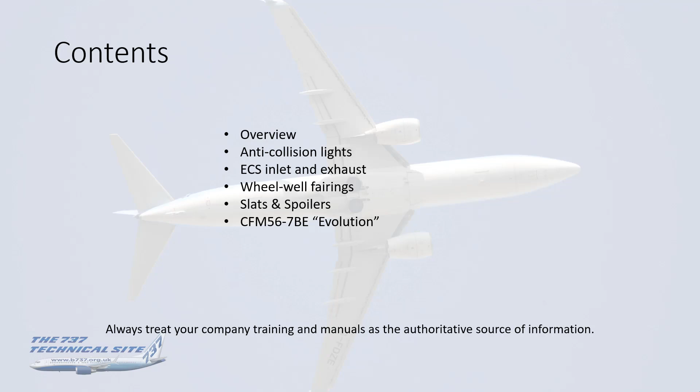Okay, so for the overview, how this came about was that in an attempt to keep the 737 as competitive as possible against its competitors, i.e. of course the A320 family, Boeing's always been continually looking at ways to either save weight, reduce drag, reduce fuel consumption or increase performance.

And to be honest, this goes right back to the very first 737s, the 100, and you'll have seen in the flaps and slats presentation I showed you the difference between the leading edge flap design and in fact the slat sequencing. Now that was done at, I recall, about line number 100, 150. So it goes back that far.

Now these changes are often added in isolation, and are usually made as incremental changes over the lifetime of the generation. And where possible, Boeing always try and offer them as a retrofit onto earlier aircraft, just so they don't sort of offside those who've bought aircraft already and want to take advantage of the upgrade. Sometimes these carry a name if there are big enough improvements, like going back the 737-200 Advanced, and sometimes they don't if they're individual. It's kind of Boeing's shout on that.

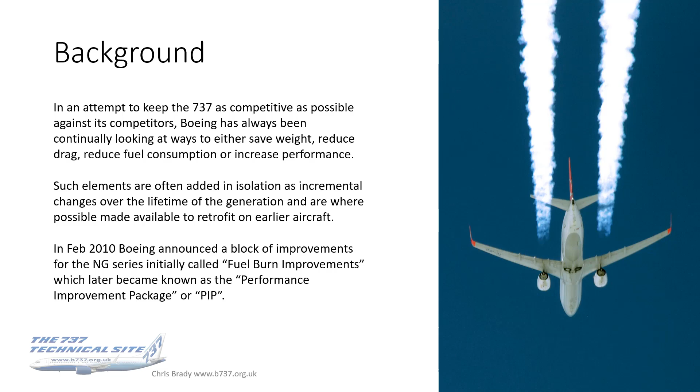So an overview of the improvements. So the PIP, it was a series of aerodynamic and engine improvements, and these included refining the wing control surfaces, a redesigned wheel well fairing, streamlined anti-collision lights, the environmental control system inlet and exhaust modulation, and the new Evolution engine. The total fuel saving with PIP was around about 2%, so really quite impressive.

It was introduced as standard, and by that I mean it wasn't an optional, and there was no cost implications, so it was free of charge. And it was something you couldn't opt out of. And this was introduced into production NGs in stages between March 2011, which was about line number 3570, and December 2012, which was line number 4302. So it was introduced over this sort of 18-month period. Now some of the improvements are available for retrofit to earlier NGs, but not all of them, and I will come on to those throughout the presentation.

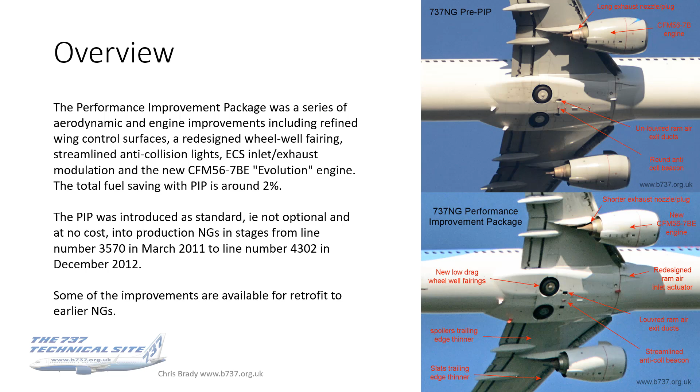The ram air exhaust is quite visible. The wheel well fairings you'll be able to see on a walk around. The spoilers and slats, that's quite subtle. You possibly could see the difference, but you'd really have to have two aircraft sat next to each other to be able to pick up on those. Anyway, on with the presentation.

So first point is the anti-colls. This is very obvious, as you can see in these photos. This was introduced in March 2011. Both the upper and the lower anti-collision lights were changed from this old cylindrical shape that you see in the upper photo to a much more streamlined oval shape with fairings around it, all in the name of drag reduction.

For the upper anti-collision light only, the upper skin had to be revised to reduce the risk of cracks. That skin revision eliminated the weight reduction milling of the skin doubler in that area under the light. Because of that structural change, no retrofit was possible.

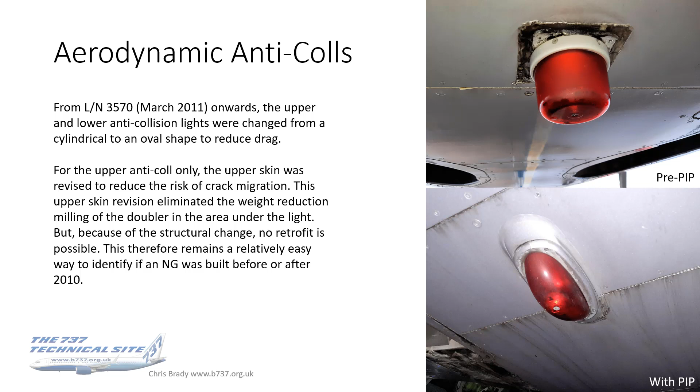So this is actually quite an easy way to identify whether your aircraft's a PIP aircraft or not, and therefore you can age it. If you've got the old shaped anti-collision light, you know the aircraft was built in 2010 or before. If it's got the new shape light, then you've got a 2011 model or newer.

The ECS, environmental control system, inlet and exhaust. So what, again, PIP is trying to do here, the whole thrust of it is drag reduction.

Now, it reduces drag here by modifying the old ram air inlet systems, well, inlet and exhaust. So what it's doing is it's adding a new modulated ram air exhaust system for the air conditioning packs. The inlet and the exit, they're tuned now on PIP aircraft. They're tuned to open and close together.

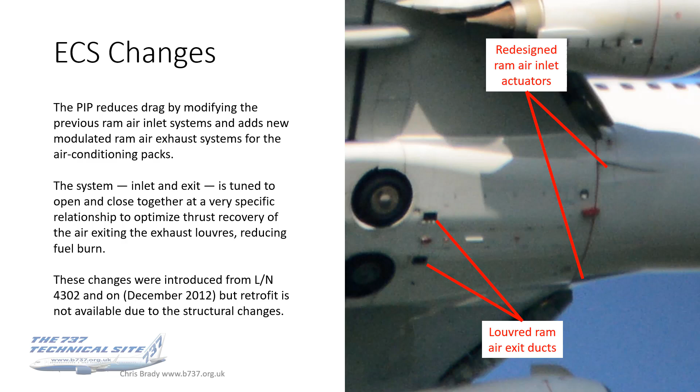The inlet doors and the exhaust louvers will now open and close together in harmony at a very specific sort of relationship to optimize thrust recovery of that air exiting the exhaust louvers, and that reduces fuel burn. These changes were brought in from line number 4302, so December 2012. So it's the latest of the changes, and this is another one where retrofit isn't available due to the structural changes. So if we have a closer look at those two parts there.

So taking the inlet first, the previous ram air inlet actuators, they've been replaced by these new smart actuators, and they give position feedback and communicate with the new added ram air exit actuators, which are attached to the louvers that you'll see on the walk around. You won't be able to see any difference to the inlet actuators on the walk around.

There is a difference. They're actually mounted at a slightly different orientation than the previous ones, and they require structural changes, quite subtle structural changes to the aircraft, which is why a retrofit isn't available. But I've stared long and hard at both, and I personally can't see the difference. That's not to say you won't, just that I couldn't.

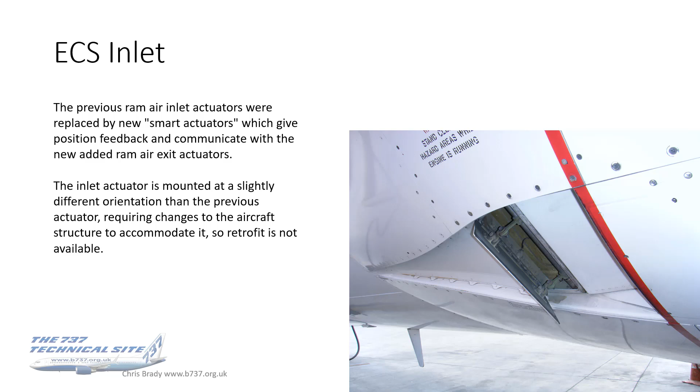These inlet actuators are not only the one obviously visible in this photo that I'm showing you here, because that's just the deflector door. It's actually hinged further back as well, and the whole thing moves to vary the air intake. On the exhaust side of it, it's much more easy and obvious to see. Upper photo is pre-PIP and lower photo is with the PIP.

So the upper photo shows the old plain oval shaped duct opening, and the lower one you've now got this rectangular shaped duct with three exit louvers. I mean, they could have kept it oval and still had louvers, but I think the louvers were just easier to build to fit a rectangular aperture. Hence, they went in that direction.

So these louvers are actuated by a combination of shafts and linkages, or as we used to say, a suitable system of levers and pulleys that are driven by these added exit actuators.

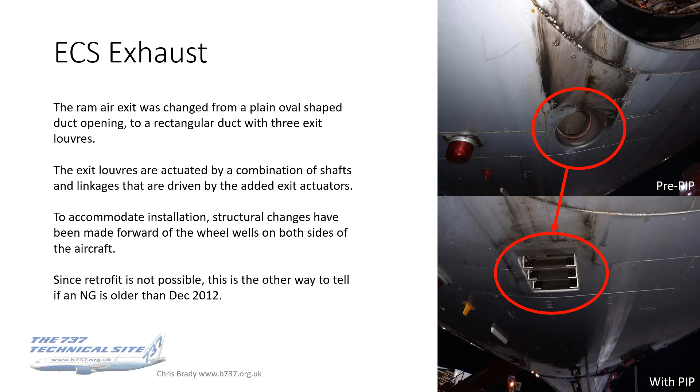Again, for installation, structural changes have had to be made forward of the wheel wells on both sides of the aircraft. Obviously, because there are two of these ducts on the left and right side of the aircraft, and that means that retrofit isn't possible. So this again remains a way to tell if your aircraft is older than December 2012, whether you've got the old oval exits or the louvered ones.

I don't know why. I would imagine they didn't think that performance benefits were strong enough to keep the weight and the mechanics of the system. If anybody does know, I'd be fascinated to know the background to why they took them off.

I believe the difference on the classic louvered system and the PIP louvered system is that the classics were mechanically controlled, whereas the PIPs are digitally controlled. But I'm not too sure on that. That's a little bit beyond my knowledge.

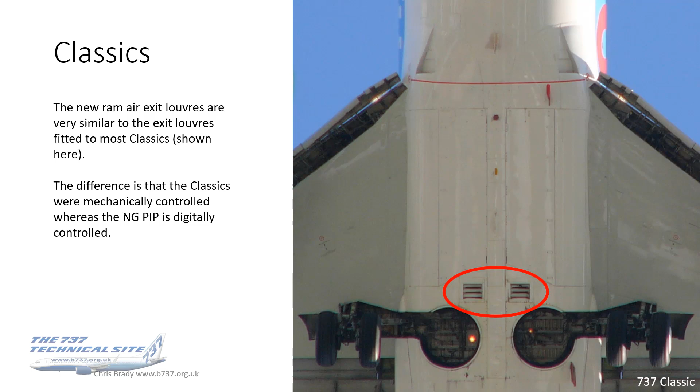Alright, onto the wheel well fairings. This one's a little bit more straightforward and cut and dried. You can spot the difference in the wheel well, and again, I know a lot of you guys like to go away after having seen the video and see these things on the real aircraft. So what Boeing did here was on the aft half, so that's the half that faces forward into the airflow of the wheel well fairings.

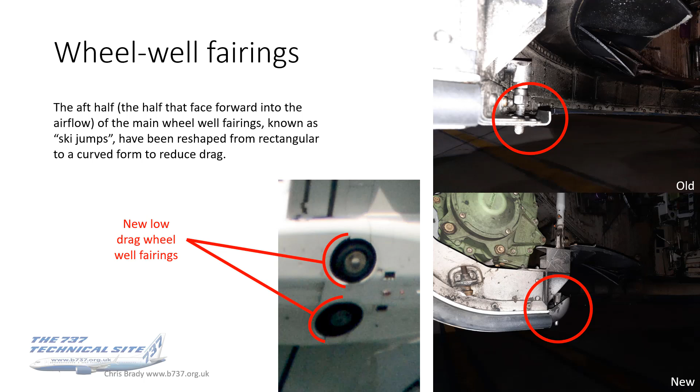They obviously didn't think it was worth doing on the forward half, because that kind of trails into the airflow. I guess there would have been some benefit, but obviously not enough to justify this. But the aft half's the one where the step really impinges in the direction of the airflow. So that's the ones they changed.

This is a different photo, better or worse. It kind of shows you the difference here between the old and the new, and what's been done. But if you just run your finger across it next time you're in the wheel well, you can feel the difference. You can feel the sharp edge on the old system.

So anyway, these new ones were standard from March 2011, so they were an early adoption of the PIP program. Again, line number 3570. They are available as a retrofit. I don't know if anybody's bothered doing it, but it's there if your airline's particularly green and eco-friendly, then they may have done it. But it's just a customer option. So if you look and you've got the new ones, you don't necessarily know that your aircraft was post March 2011 because it could have been a retrofit.

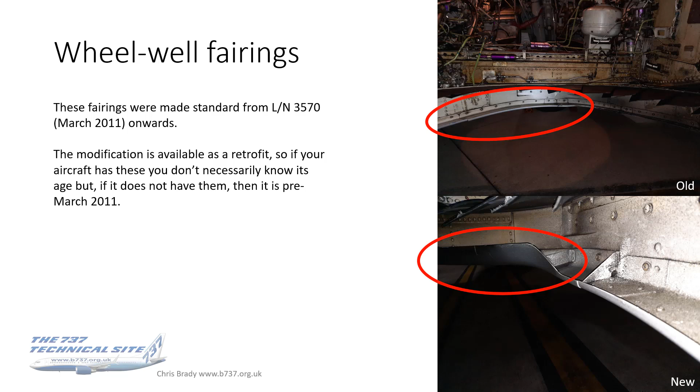All right, onto the slats and spoilers. These changes are really quite subtle. Very, very hard to spot if you can spot them at all. But I'll cover them because they are quite an important part of the whole package. So the trailing edges of the slats were reduced in thickness. They were basically made thinner by replacing the old fiberglass filler that was in there with an aluminium machine tapered arrowhead.

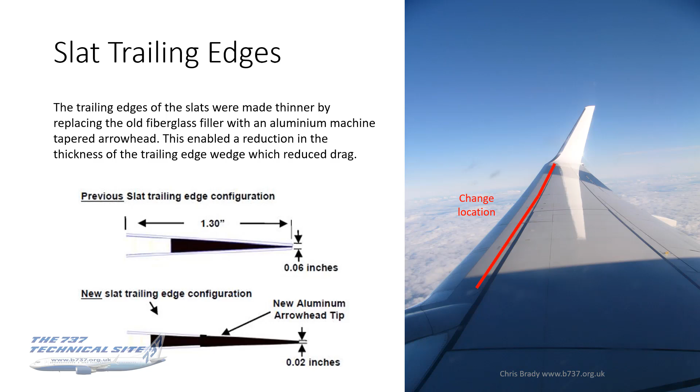So they got the thickness in the trailing edge wedge down from 0.06 of an inch to 0.02 of an inch, which we would probably think, why bother? But the aerodynamicists did the work on this, and that trailing edge step, be it only 0.06 of an inch, was enough to create a stagnation point behind it, and hence a vortex as the air flowed over it. And vortices, whilst they can be useful in localized places for lift, what you can't escape is the fact that they give drag. So again, in the name of drag reduction, these trailing edges were machined down in thickness to this new fine level.

The spoilers got the same treatment. So all of the flight and ground spoiler trailing edges, except 2 and 11, for some reason, and I'm not quite sure what that is. They're the outboard flight spoilers. They were reduced in thickness by 60%. Again, to reduce drag by reducing that aft-facing step.

The method was slightly different, so there was no honeycomb on this part, but they had been extruded aluminium fillers, and they were replaced with machine tapered ones. And again, machine tapering you can make far more fine and thinner. So the step, as you see there, is reduced from 0.14 of an inch to 0.057. So that's half as thick. The other thing they did was reduce the thickness of the rub strip as well, and that's pretty much halved in thickness.

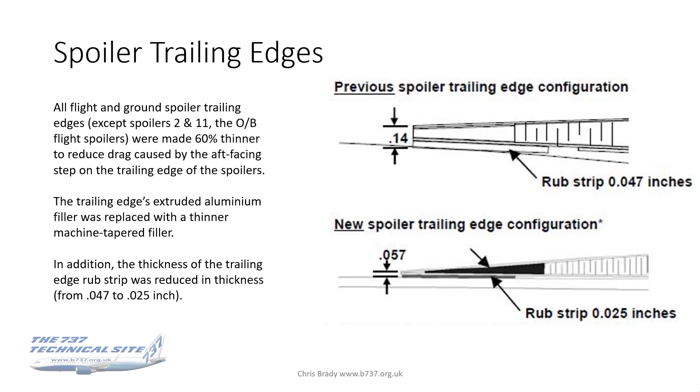The last thing they did on here was to reduce the spoiler gap, and again, it's difficult to spot, but this is probably the one of all of these that you might be able to spot. So this photo I just managed to take at the right angle, looking over the wing.

What I was actually trying to get a photo of was the 737 with the Concorde in the background. This I took just before an air test from Filton on the 737, which I think was going to some country airlines in the States. Anyway, that's Concorde, that's Filton.

But let's get back to the spoiler gap. So it's the gap between the spoilers and their respective flaps. That's the gap they were going for. Now these were actually historically set to a higher than nominal position. So the gap was built in to improve the lateral control handling qualities on, in particular, the 737-700. So it wasn't actually necessary on the 800 or 900, but for commonality in the manufacturing process, the gaps were left there. Anyway, when the aerodynamicists were looking at ways of reducing drag, this spoiler gap was questioned.

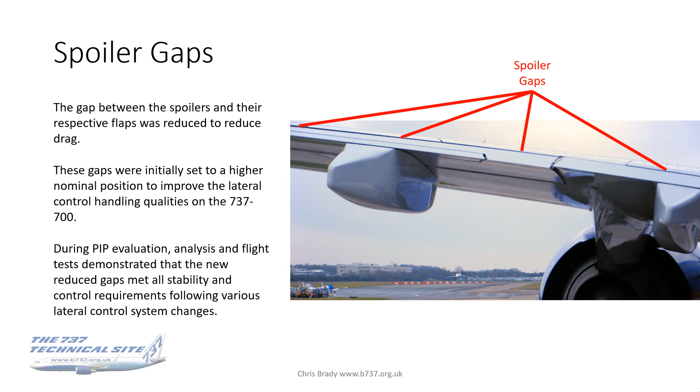They then did the analysis and the flight tests on these, and they found that the revisions met all the stability and control requirements, so the gaps could be reduced, which they subsequently did. These changes were made standard again from line number 3570, so March 2011 onwards, and all of the new spoilers and slats are fully interchangeable and intermixable with previous spoilers and slats.

So it's all the bits marked in red on the graphic there, and this is important because if a part gets damaged or needs changing for whatever reason, Boeing or wherever they come from don't want to be holding a stock of old parts, or an aircraft not to be able to fly because it can't get an old style part. So the new parts, which are the ones in production, which you'll be able to get hold of more easily and probably cheaply, can be switched out on an existing aircraft.

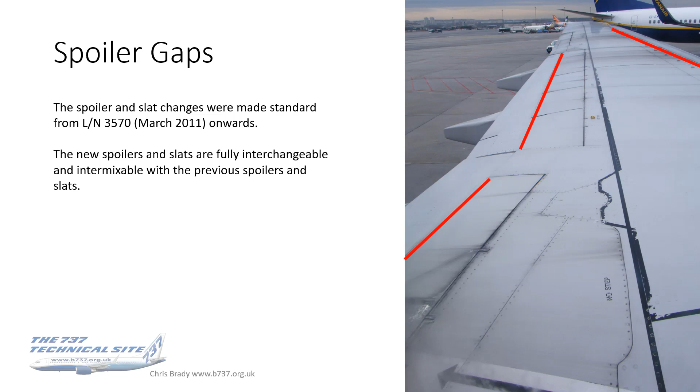Alright, this is the big change. This was really kind of what the game changer was. The 7B Evolution engine. This was announced back in April 2009. CFM redesigned several components of the 7B engine and named the new one the 7BE, where the E stood for Evolution.

They used, as they say in their literature, 3D design techniques to improve airfoils in the high and low pressure turbines to improve engine performance. In addition, they improved engine durability and reduced the parts count to achieve lower maintenance costs. So they were going for two things here. They were going for both performance improvements and reducing maintenance costs.

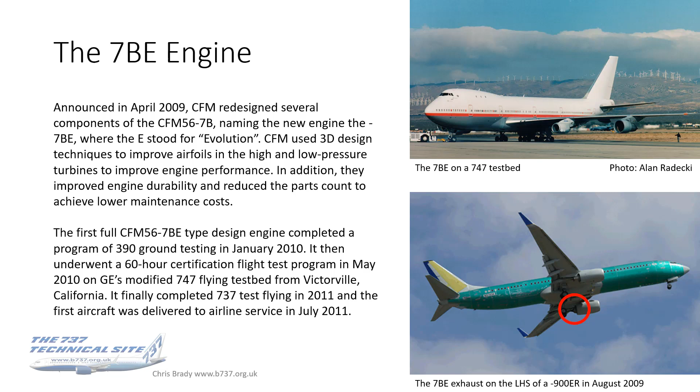So looking in more depth at those changes, the PIP engine came in July 2011, and it's got the following improvements, and there are about 6 of these in total. So the first one was in the high pressure compressor section. The diffuser contours of the HP compressor outlet guide vane were optimized to improve the diffuser area ratio and reduce the pressure losses there.

The OGV replaces a previous two-dimensional one, i.e. a flat, well, I say flat, obviously they're all curved to a degree because they're an aerofoil, but CFM like to refer to the old one as 2D and the new one as three-dimensional. In other words, they were bowed and swept. So they look a bit more like the fan blades on the LEAP engine. They're much more curvaceous, if you like. That's what they mean by 3D, bowed and swept.

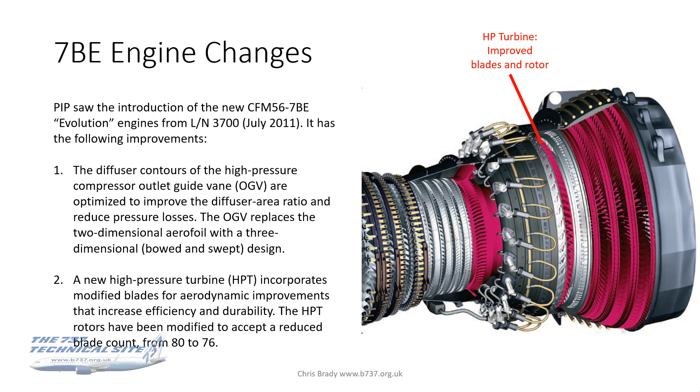The second one was a change in the high pressure turbine section. These blades were also modified for aerodynamic improvements, increasing efficiency and durability. And the other thing was that the blade count on this rotor was reduced from 80 to 76. And that again is weight saving, it's maintenance cost savings.

I'm not sure if you're all aware, but as part of engine overhaul, many blades are replaced with either new or refurbished ones, and each of those has got a cost. So if you can reduce the blade count, you reduce the cost.

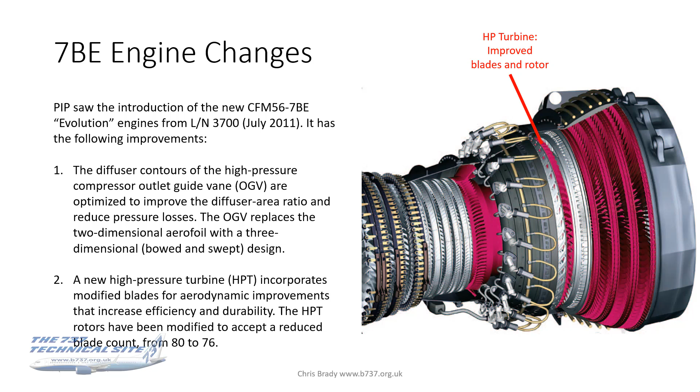The third change is on the low pressure turbine section, and this was quite a big change. These new blades, vanes and rotors had their number reduced by around 9%, which is quite a high count reduction. The new disc and retainers match the blade count, and the new case and shrouds match the new axial staggering. So it's all redesigned up there.

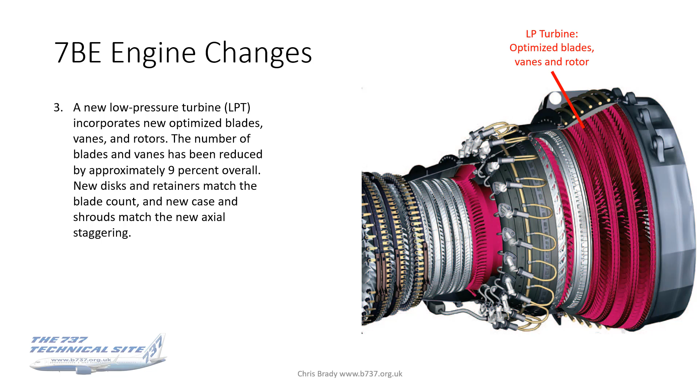At the back end, this is the bit you will be able to see. There were several changes. The most obvious one is this new primary nozzle, which was shortened by about 18 inches, or 46 centimeters, and that's a very easy way to identify what engine you've got. If you've got the one that looks like the picture at the bottom, you've got the Evolution engine. The picture at the top could be either the basic 7B, the tech insertion, or dual annular combustor versions.

Not only was it shortened, but the lines, curves and profiles were recontoured for improved nozzle coefficients and losses. There was an acoustically treated honeycomb lining built into the primary nozzle's inner wall, and the reason for that was to ensure there was no increase in noise as a result of shortening the exhaust.

Any boy racer with his first car or motorbike will tell you that if you shorten the exhaust, it makes more noise, sounds more punchy. That's great if you're trying to impress the girls with your car, but it's not good for noise pollution and noise profile. So yes, the exhaust was shortened, but this acoustic honeycomb lining offset the potential noise gain from doing this.

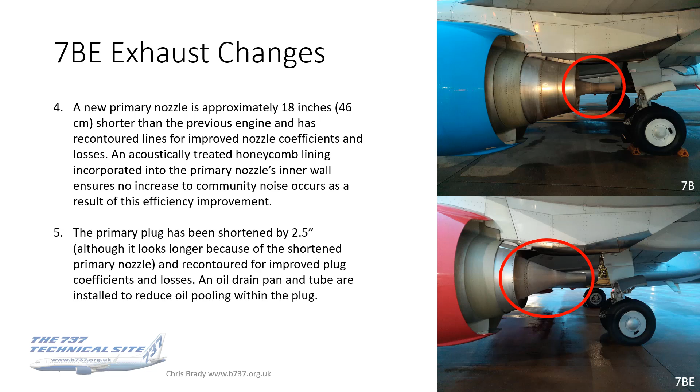The last change was a new strut aft fairing heat shield assembly. This is the part where I said you can actually see it. In fact, I think you can see it on this photo. If you compare the upper and lower photos, you'll see that plug length and where it meets the join.

This heat shield has got a new heat shield blanket, inboard plume suppressor, scoops, and a strut cover plate. The reason for this, again, was because that exhaust nozzle was shortened. The nozzle and the plug are shortened, so you're exposing the engine strut to potentially more heat source. So what these changes have done is reduce the thermal distress, as they call it, from that shorter nozzle configuration.

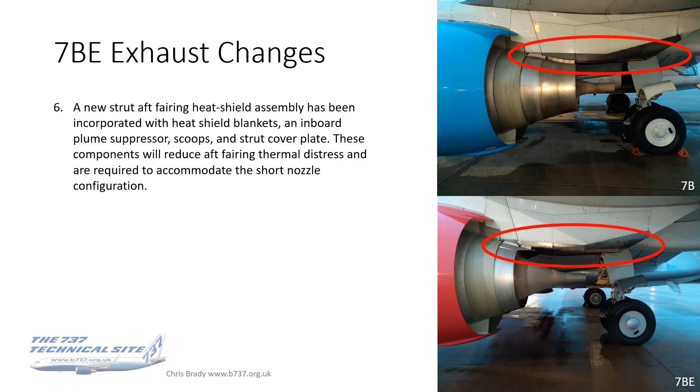So those were the changes. These are the benefits. First is a 1% fuel saving. This is just from the engine alone, because the whole PIP package gives you a 2% saving, and an improved EGT margin over the 7B with no noise or emissions penalty.

That's significant. Engine maintenance costs are also reduced, up to 4% for the highest thrust rating, the 27K engines. The higher the thrust rating, the greater the maintenance cost improvement. So if you're operating one of the lower thrust ratings, you won't have quite 4%, but it goes up to 4% for the highest engines.

Now, remember me mentioning the oil drain pan and tube in the plug to reduce oil pooling? Well, this in turn leads to a reduced likelihood of what's known as candle fires. Candle fires are a kind of tailpipe fire, but quite a specific one. They're caused by an accumulation of oil collecting somewhere in the engine exhaust, and you get these after shutdown. Not very often, I have to say, but this is when you'll see these candle fires.

Oil collects, drips or runs down into a section of the exhaust that's particularly hot after flight, and ignites. Usually the vapors go first, and then that causes the rest of it to burn. Now they don't burn very hot, and they don't actually trigger an engine fire indication in the flight deck, so you'll probably be the last to know about it. Usually what happens is the ground staff start hopping about saying, oh, you've got an engine fire, and trying to attract your attention.

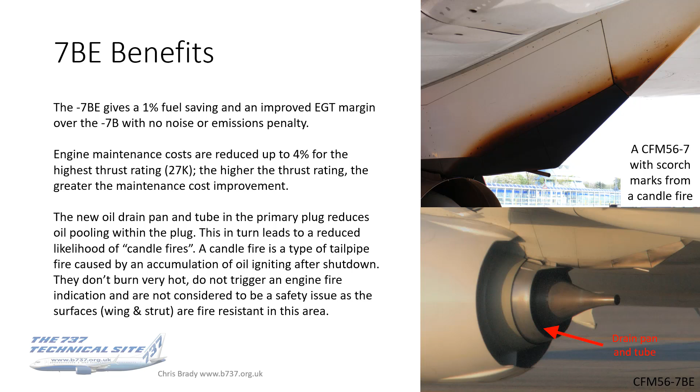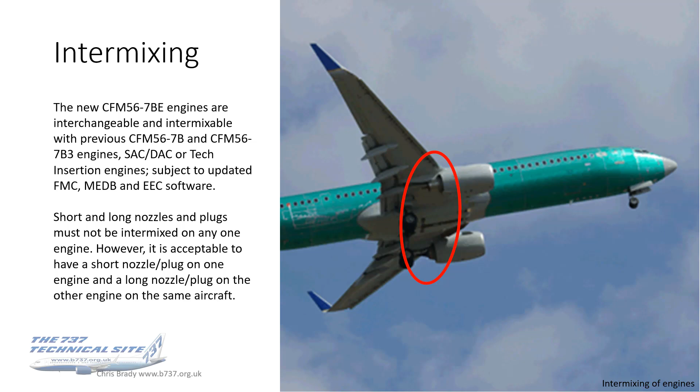Now, as regards nozzles, short and long nozzles and plugs, they can't be intermixed on any one engine. However, you can have a short nozzle plug combo on one engine and a long nozzle plug combo on the other engine on the same aircraft, as per this photo. So intermixing is pretty much every combination except within the engine is allowable.

One last thing to mention is that the engine in-flight relight envelope was revised in 2012. Now, when the PIP was introduced, all the Boeing literature stated that the PIP engines were operationally transparent to the flight crew - operationally transparent, there's a phrase. So what they meant by that is that there were no changes to the normal flight crew procedures or AFM performance relative to the previous engines.

Personally, I would challenge both of those clauses, because very soon after the Evolution engine was introduced, like the very next issue of the QRH, the relight envelope was changed, and I think that's far too much of a coincidence. And flight manual performance changes - well, we know the engine's 1% more fuel efficient, therefore there must be some changes in performance. But anyway, that's what Boeing said when they heralded PIP.

So the in-flight starting envelope was revised in the 2012 QRH. The max relight envelope was reduced quite significantly, actually, from flight level 270 to flight level 240. So you've lost 3,000 foot of potential relight space there.

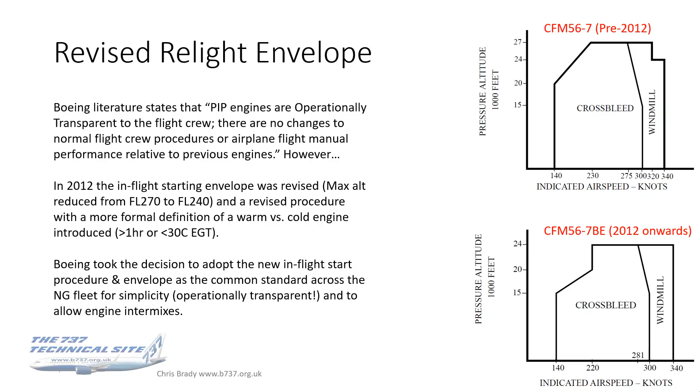There you go. That's it. That's the PIP.